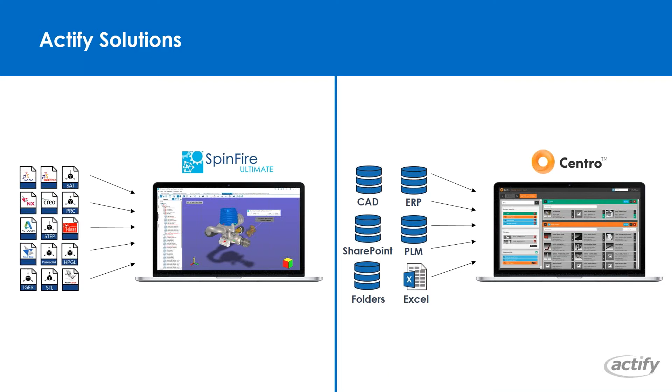Many companies have that need to access CAD across the enterprise, and they might find themselves with numerous different CAD files or with numerous different CAD applications. And in that case, we offer a very flexible fit for small and large organizations in order to meet the CAD visualization needs. We have everything from a single seat and node lock license, a floating license where a seat license can be shared across multiple clients.

Access through a server, and an enterprise agreement where you might find that this could be a good fit for your organization if there is a large need across your enterprise to view CAD. For the cost of a cup of coffee per day, your enterprise could be accessing CAD on the road, at work, or from home.

So yes, good afternoon, everyone. So to begin with, just starting on the home page, this is something that could be quite easily missed, but you can, in fact, of the recent CAD files that you've opened, right-click those, and we have all these options here. So we can add those recently opened documents to our SpinFire library over here, which I'll go into more detail later on.

And we can import that model into our existing, the currently opened workspace. We can also do the CAD to CAD conversion from these recent documents, and pretty much these same options are also in the library tab. And the Explore, that takes you to the folder where the file's been stored, and you can also see the properties on that file from a Windows perspective.

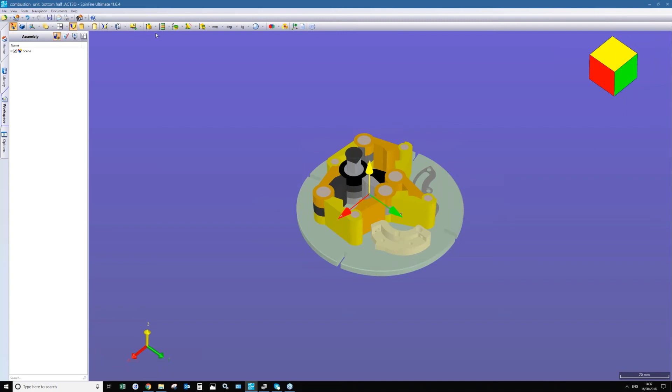So now coming across to our options application page, we have the theme. So by default it's the modern light, but there's a dark version, there's a classic version. So for those of you that have been long time SpinFire users, you might have a preference for these kind of icons that you're more used to from using professional.

And you can also change the color of the menus and everything here.

For check for updates, by default the application will check for new updates every week. But if you're deploying this across the enterprise, your IT can control this option, setting it to never. As soon as I set it to never and go to Help, Check for Updates, it's grayed out, ensuring you and your colleagues use the same version of SpinFire and preventing various issues. If you don't want notifications about updates so often, you can set it to manual only, and then do updates when you feel ready.

About the recent documents that we had open, by default that's normally 6, but out of my preference, I like to have as many as possible, so I have it set to 10.

This option here, limit number of undo-redos, typically this value is at 100, but if you're expecting to do a lot of rotations and other small movements, those all count toward your limit. That's my preference—I like to have that at about 200 because I've noticed I can hit 100 relatively easily.

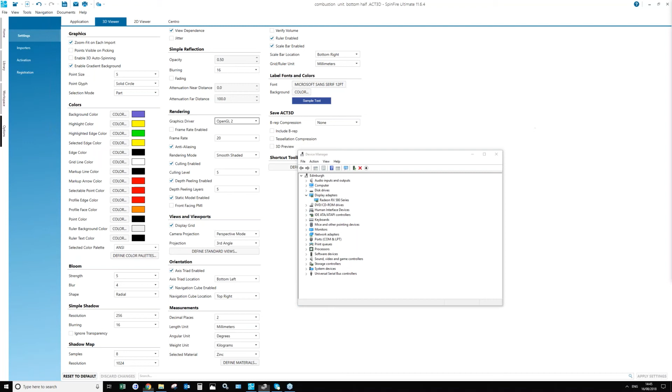And just to give you a quick example, in the case of my machine, this is an AMD graphics card, and you go to their website. The interface is very similar for the other two graphics cards as well. So you just choose the graphics card, what series, and then the specific version.

And then typically when the website takes you to the next page, you have to choose the drivers appropriate for your machine. So this is obviously the operating system you're using, so Windows 10 for example, and then whether or not your machine is 32-bit or 64-bit. But I imagine the majority of you are using a 64-bit operating system.

So I would suggest updating both of those graphics cards first, and then the next level to diagnose or address this issue would be to consider disabling one of those graphics cards. But I would suggest you discuss this with your IT, your third-party IT, or with Actify support before taking that step.

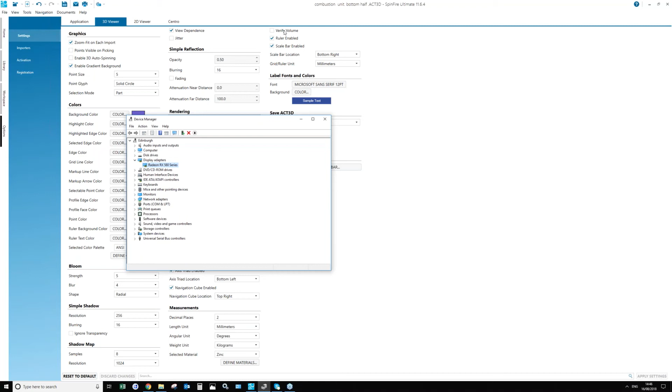And just quickly on the topic of licensing, if you do have a floating license, you should always use the activate floating license, but always ensure that the server name, the MAC or physical address, and the port number are accurate for the machine that is hosting the floating license manager. So if there's been a server machine change, you should change those values appropriately.

Then do a license server status, and assuming there's no error message, then do the activate floating license, or network activation, as some of us like to call it. Because after that point, let's say in your instance, perhaps you have more than one floating license on a particular machine, or perhaps you have, to your knowledge, various performance issues with your network.

So sometimes you need to determine, you have to specify a specific port for SpinFire. In this example, I did a network activation and it pulled down the file to my end user machine. You can see here in both files it's pulled down, it has the port that was saved in the license file on the floating license manager. So don't try to do online activation because it won't have that port, and it just causes a number of issues. So if you're a floating license user, you must use the activate floating license.

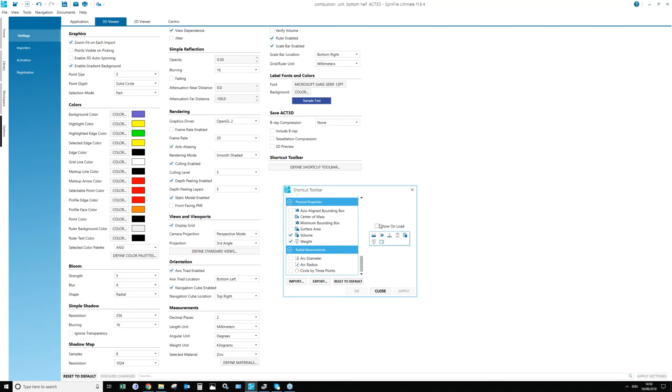We have this option here, show on load, so every time you load that workspace, this toolbar will show up. But if you don't have this on, because you may not be using it all the time, there's a shortcut on your keyboard, Control and T, to turn that on and off. So actually, if I give you a very quick example of that, Control and T, you see that?

So there's a lot of hidden shortcuts with SpinFire. If you go to our help website, you'll see more examples of things like that.

Coming across to the 2D viewer, we have again the colors, the grid line, the markups, the background. We have the graphics driver settings again, the default values for the measurements. What we have on this that's not on the 3D is the stamps - accepted, approved, confidential, etc. Those kinds of stamps you may want to put on a 2D document. You can use these, or add your own in here.

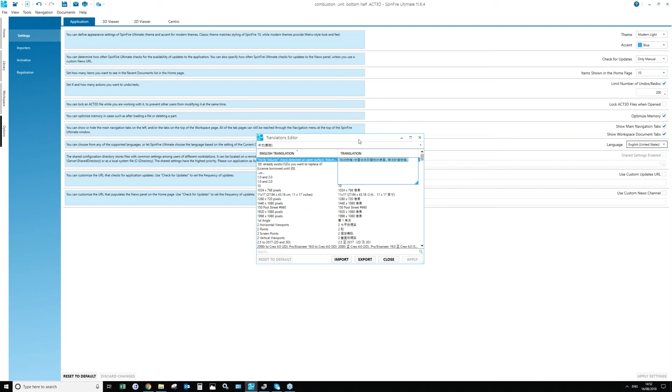Again, export, import. And actually, sorry, coming back to application - we do have 11 languages in SpinFire, and I just remembered in terms of import and export, we have a translation editor. So if you come in and choose a language, if you have a language you want to use in SpinFire that doesn't exist, you can choose any one of these languages. I'm going to use one of the Chinese dialects here - I can go in and put another language in, like Greek for example, and save that, export it, import it into other SpinFire copies.

So again, the shortcut toolbar is here on the 2D viewer.

Let's now jump across to importers. So as of 11.6.4, these are the importers we support. Now, instead of going through each importer to check or enable or disable things, I can actually just go to this all options, and going through the list slowly, you can see where that setting will apply. Like this attribute one, that's probably the majority of the importers here, so CATIA, versions, etc.

In terms of common issues, what we would typically suggest to try, what settings to change - what always comes to mind is to have a look at construction and references, to maybe do import hidden or import and show. The other ones would be the hidden objects, then there's wireframes. And if you've noticed a discrepancy with perhaps volume calculations or something, we have the tessellation level here. I always recommend you do extra high and then retry those calculations, because you should see a more accurate result then.

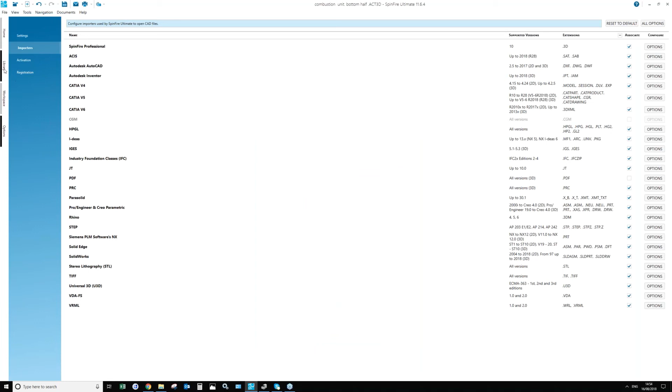So now let's jump over to library. The library are just the connections I've set up. They're going to various local folders of mine, but it could of course be across the network where my machine has access to my user profile.

Now, just like on the home page, in this interface I can right click, I can import, or I can just load the assembly tree, which can be very useful for loading very large assemblies when you don't necessarily want to work with everything in that assembly. There may just be a specific part you want to look at.

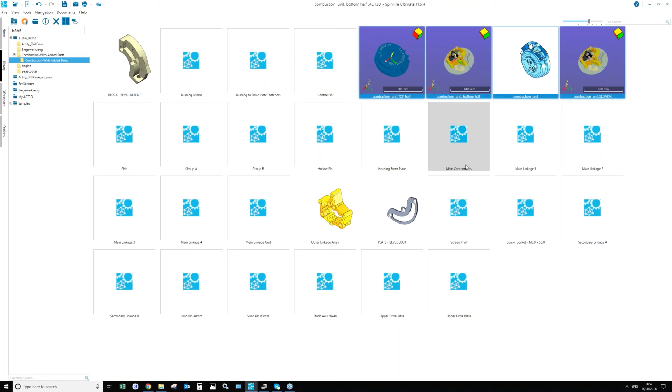So now let's import this into my document. Just a quick reminder, you can select multiples by doing Control left click, but in this instance I just want to import this one. So there we have it, we have the full assembly here now.

And it's the supported CAD formats you can import. You can of course import any of them into the same Act3D file. So it's not just importing specific formats — you can import all the formats into the Act3D file.

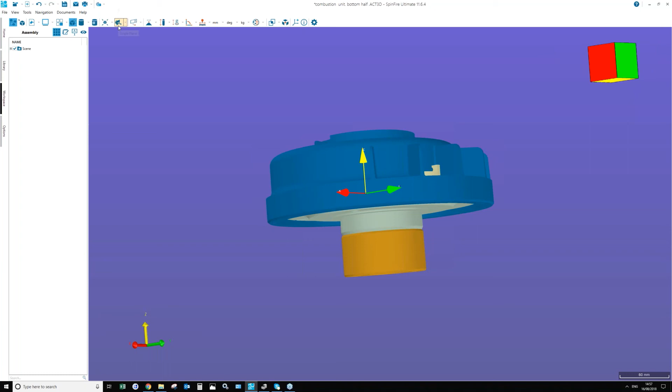So now let's do a section cut. This is a single plane section cut. We can do up to three plane section cuts. We can flip the section, of course.

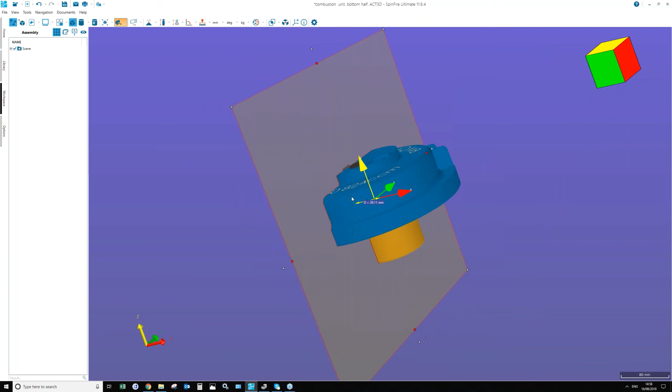And if I right click that section cut and do a projection mode, and stretch that, you'll see here now we have a shadow of the model. Now if I right click and go to calculate, and click projection area, we get this nice calculation area — projection direction, sorry. So let's hide that for now.

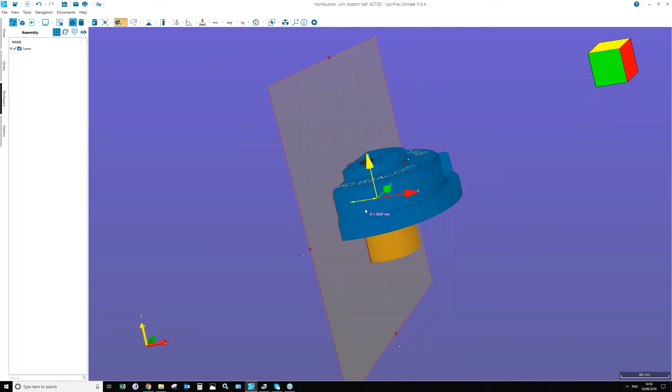Let's bring that section cut back. Let's get it to the middle. You'll notice when you're doing section cuts, it will kind of stop you once you reach halfway in the model. So as I'm dragging this, I know when it's hitting the middle — there, it clicks in. So I like the look of this cut.

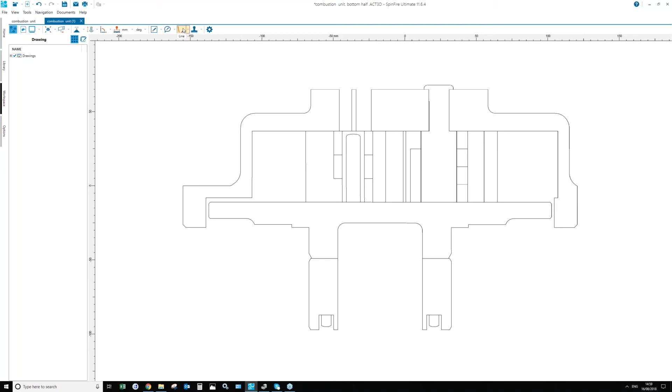So what I'll do is right click the section plane again, and create a 2D document. See that? That's a very nice section cut there, a 2D image document of it. And like I mentioned earlier, we've got the stamps, we've got the smart dimensioning.

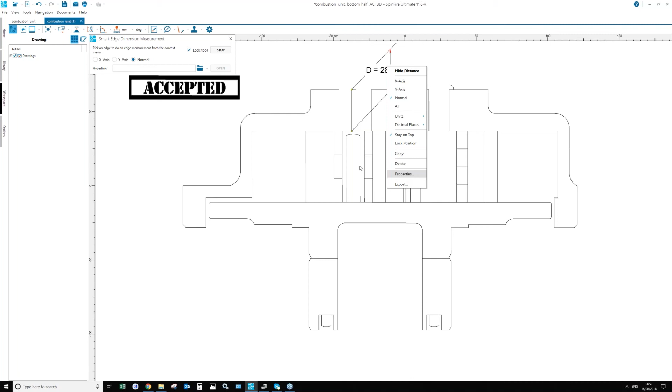It's very important when you do notes or measurements — it can be worth checking if the result is not quite right, or if the smart calculation isn't quite the return you were wanting. It's a good idea to always right click and check the options there, whether it's values or other settings, just by right clicking in a lot of places, even in an assembly tree. And if you right click, you can change the color of the arrow, the line.

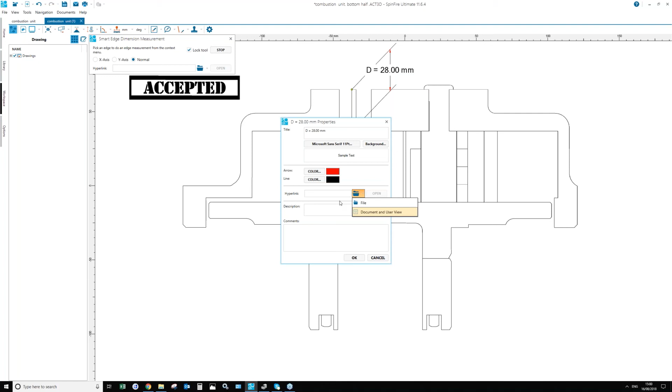Hyperlink in the notes, or even the measurements — you can do hyperlinks to user views that have been saved in the Act3D file, or it could be to a website. So if you click there, you'll see that. Or even to a file, in fact, not just a website — you can go to a file just by making that shortcut.

And if I come back, just to quickly mention, once you've got that section cut, you can export that to a DXF as well.

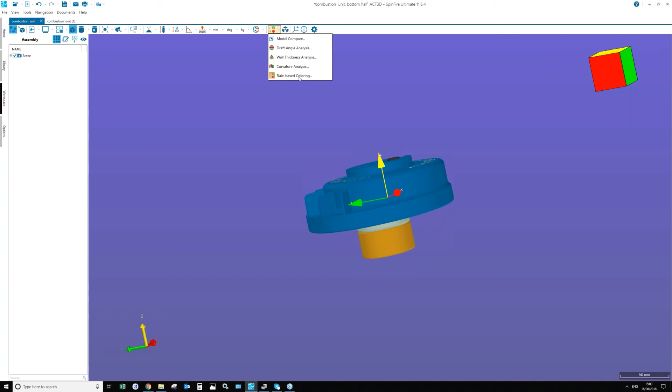Let's do one of the newer features, which would be the rule-based coloring. So in this instance, let's say I want a specific match, and I want the specific match to be green. If it doesn't match, let's do transparent for the moment.

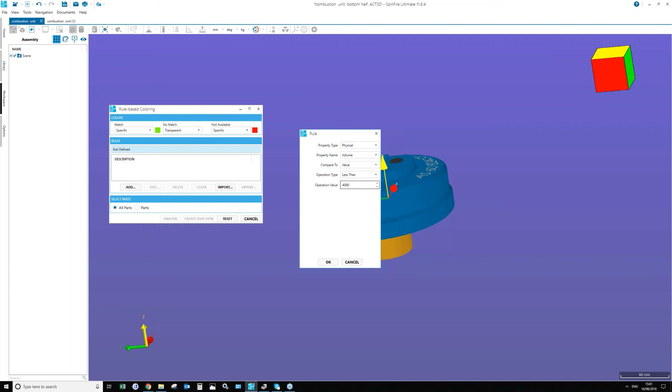We click add. This is the property type. So we go from physical, go to volume, and I want to compare to a certain value, and I want that value to be less than. Let's say 4,000. And if I then do an analysis...

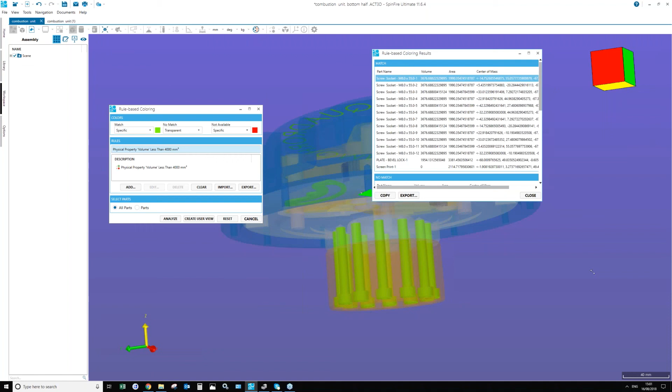Everything that was more than a certain number of the volume comes back transparent, whereas the parts I'm interested in come back with this green. You also get this output of raw information as well, so stuff that matches and the stuff that doesn't match. That can be copied to a document, that can be exported.

Let's say I change my mind, I don't want to do transparent, I want to hide stuff instead. So let's analyze that, and now those parts are hidden. But I'm still getting one thing there that I'd rather it wasn't there. So let's try...

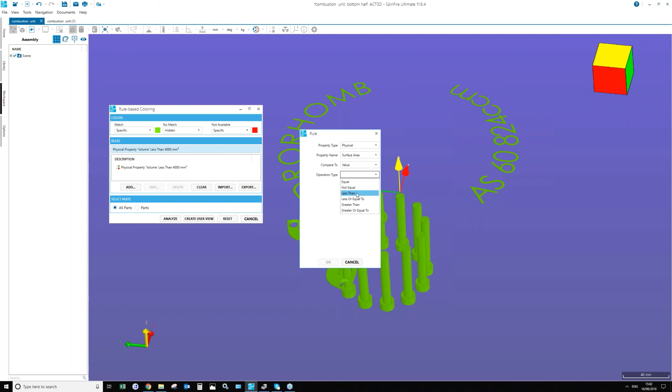Well, let's do surface area, value again. Let's do less than, I believe it's 2000. And just to quickly explain the logic of the rule, in a sense it's like an if statement, if any of you know what an if statement is.

So the physical property volume less than 4000 and the surface area less than 2000. But the 'and' could be changed to an 'or,' so anything less than that or less than 2000 of the surface area. But in this case, I want to do an 'and.'

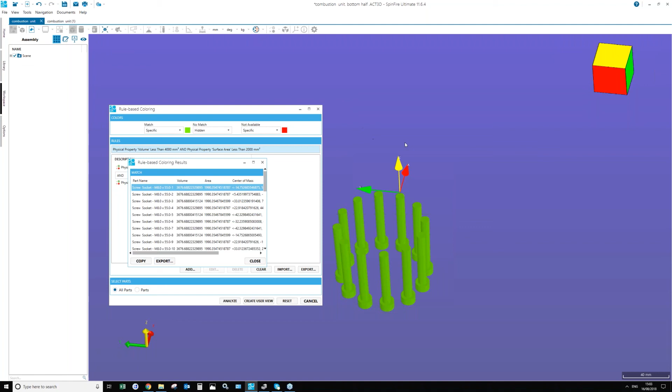So let's analyze. And now that text we were seeing along the top of this model, that's now been excluded. I can see that if I just expand the window, and where it is, there we go, screen print, yep, so it's there.

And of course you can save that to our user views. Just to give you some examples, quick examples of other user views I've done in the past, I'm just opening up this drill case.

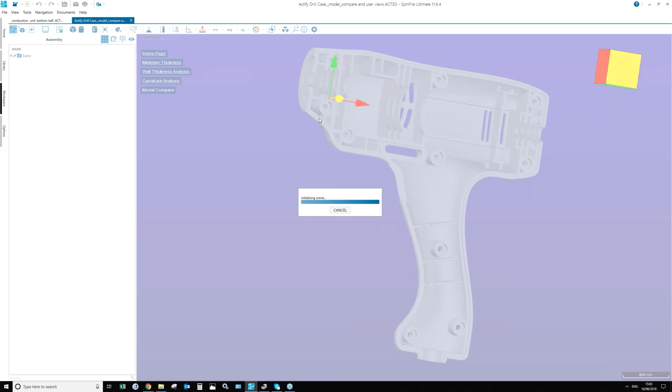And I'm going to my views tab, and under the user views here we have all these different analysis or measurements I've done. So we've got a minimum thickness I've done, a wall thickness.

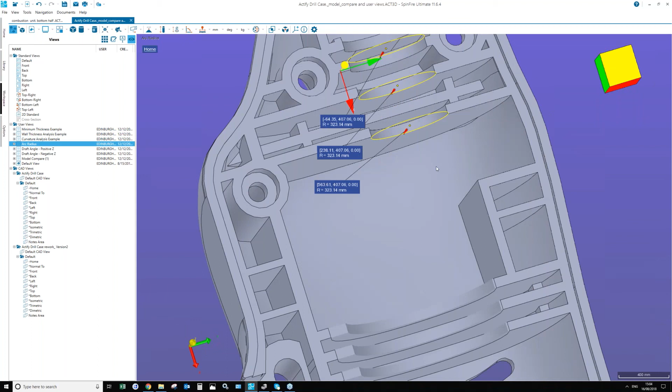We've got curvature analysis, arc radius, and oh yes, to do a pan view you just hold your middle mouse button, whereas the left is the rotation. I'll get a little bit more into that, I'll go back on that topic in a moment. There's draft angle, of course.

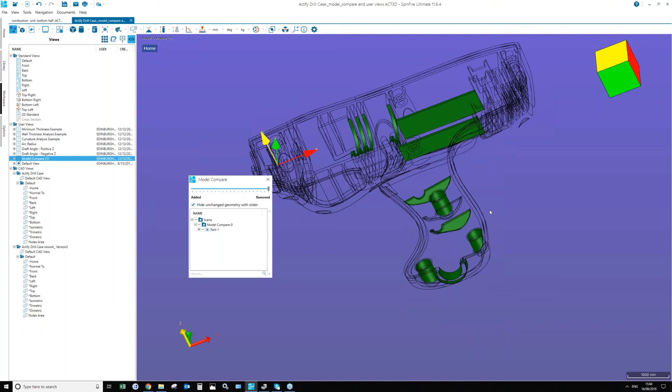There is model compare, so after you've created a model compare, you can... this is a pretty cool feature. You can do the whole adding and removed, you can get a nice close look of what exactly has been removed or added when you're comparing two models. So what I did in this case, a little bit like with the combustion unit, I imported two drill cases with these slight differences in pieces that have been removed or added.

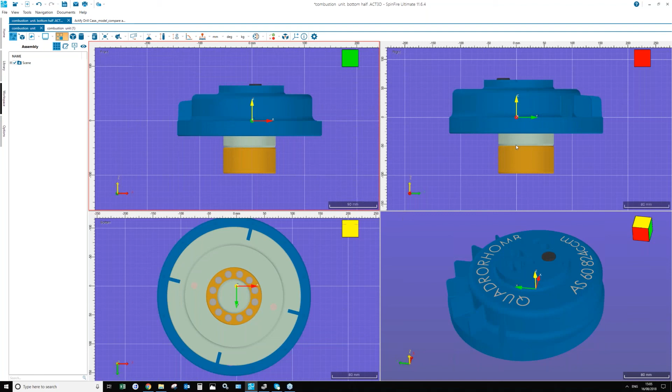Also, coming back to this model, we have these other views. So we have the grid, we have the rulers, you can zoom in, etc., and you have the 3D view still.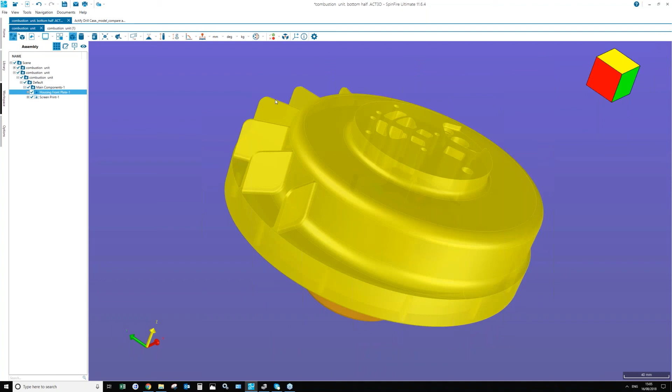Coming back to about selection and everything, so by default, if I was to select, let's say, the top half of this assembly, I'll right click that. I'm selecting more than one, I'm selecting this whole component. Whereas if I do the part selection mode and I do that right click, I'm going to be selecting this specific surface.

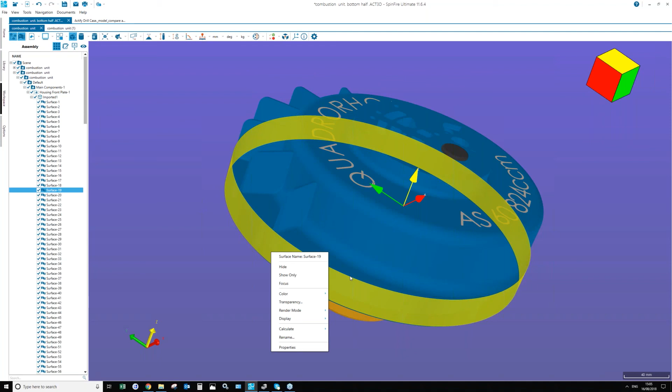And then if I want to, I have that option to show or hide. You'll notice when you do a surface selection, it will expand the assembly tree to get you to that point exactly where that surface is in your assembly tree. So let's hide that one. Now it's hidden. I want that back, so I just tick it here.

Whenever you're doing any kind of render mode, if you want to do any sort of render modes, calculations, etc., you can always go into your assembly and right click. You don't have to necessarily go in to do that within the workspace environment.

So now I'll jump over and talk about print preview. I think since about a year ago, this has had a number of improvements and new features. There are so many options now.

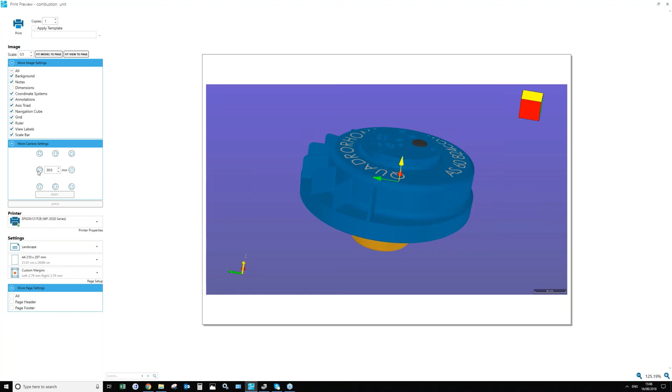Just to give you some examples, with the page settings we can hide the header and footers, adjust the camera slightly if we wish, and if you know the value you can enter it here. We can reset the camera to get it back in the center, and turn off all these image settings. Now I have a white background, so obviously you save on ink doing that. I can also fit the view to the whole page, or fit the model to the whole page. So there's lots of options here.

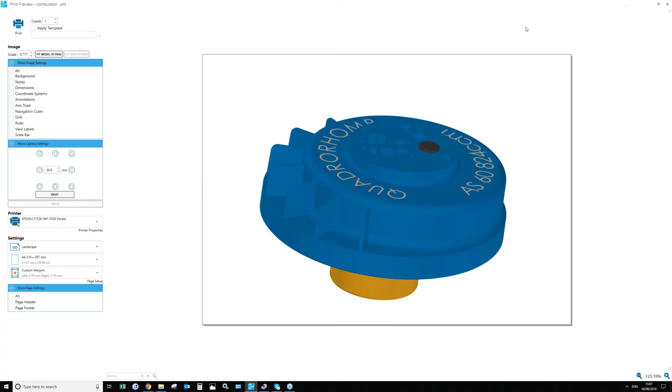And of course, if you have your own template and want to have a logo, you can do that on this page and some other various pages.

In terms of other things we can extract or download from SpinFire, if you go to File, Export, and then Parts List - this isn't a very big assembly, but just to give you an idea, currently I have this in a flat format. But if I switch to multi-level, you get an idea of the sub-assemblies and everything each part belongs to, and you can see the quantity.

Again, for the parts list you can use a custom template. Let's say I want to see some physical properties.

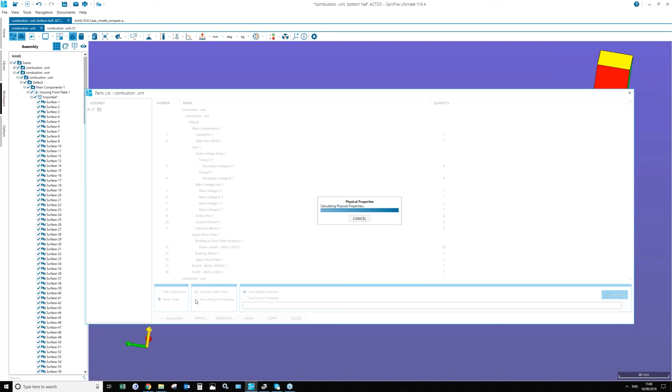So now we see the volume, the surface area, etc. And again you can copy, save, and preview. So if I go to preview... there we go. Very nice.

So yes, I believe that was just about everything I wanted to highlight to you all today. Thank you for attending, and I'll pass you now back to Scott.